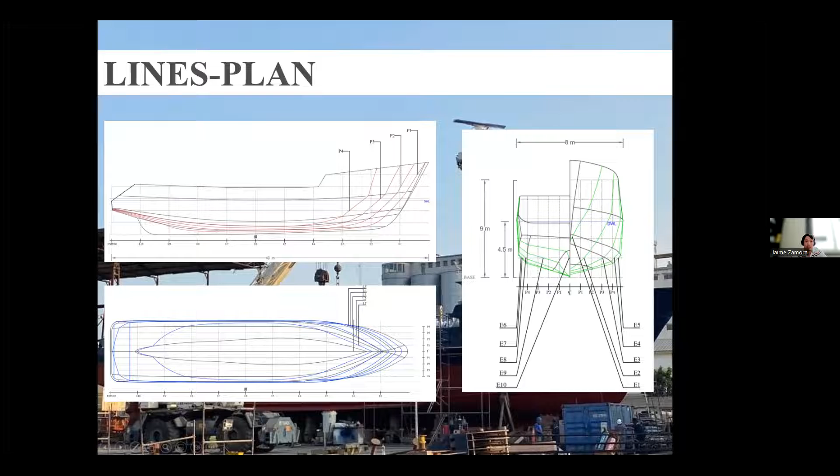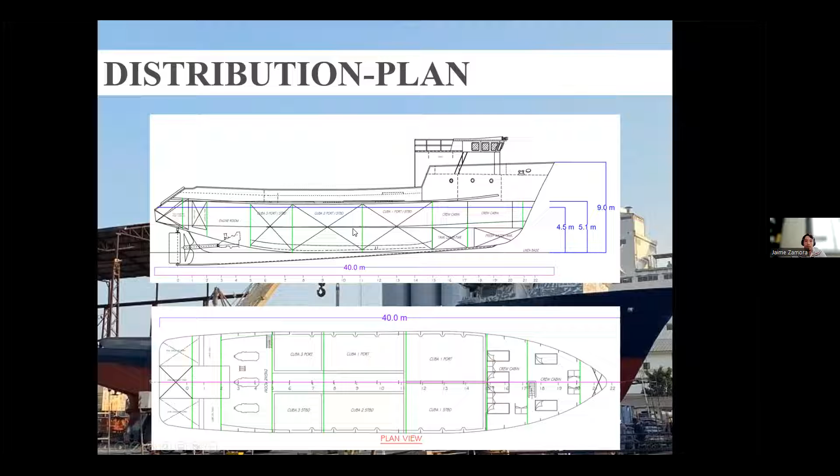The lines plan is shown in this part. We have the stations, but we are thinking of getting more stations to develop better results and a better 3D model. In the distribution plan, we can see the tanks, the compartments, and the ship holds, and all of them will define the loading conditions shown now.

In this project, we'll analyze 4 loading conditions. The first is the departure from port, with the tanks at 100% and the fishing holds at 0%. The second is the arrival at the fishing point, when the tanks are at 50% and the fishing holds 0%. The third is the departure from the fishing point with the tanks at 50% and the fishing holds 100%. And finally, the arrival at port with the tanks at 0% and the fishing holds at 100%.

One thing, when you present the loading conditions, try to mention the expected total weight, because in this case I cannot see which one has the largest weight. Usually, if a ship moves a lot, the first recommendation is to make it larger, because when you increase the size, you increase the mass and the inertia, and the acceleration is reduced. So that information is good. That's what I was expecting from you.

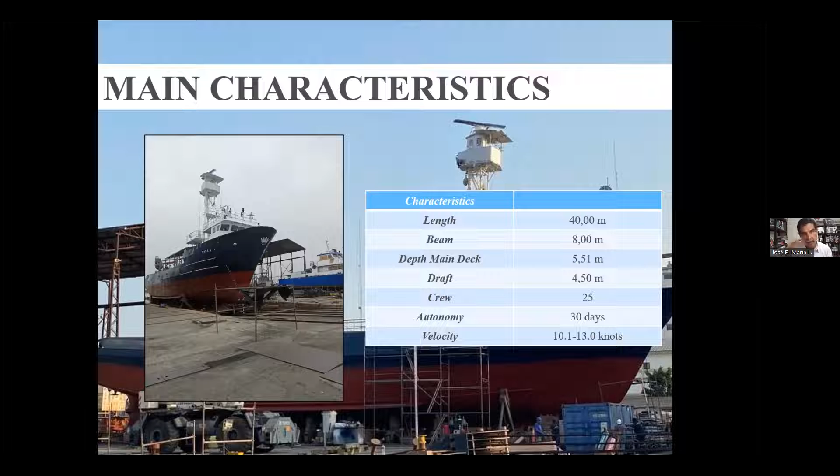Maybe you remember this from ship resistance and propulsion, but with full load, we are probably not going to reach 13 knots. So it would be very interesting if for a full loading condition you accept that you're not reaching 13 knots and do the analysis with only 11 knots. The others you can do with lower displacement but higher velocity. In that case, we can convert these four loading conditions. And very importantly, you have to start thinking about which parameters you are going to evaluate.

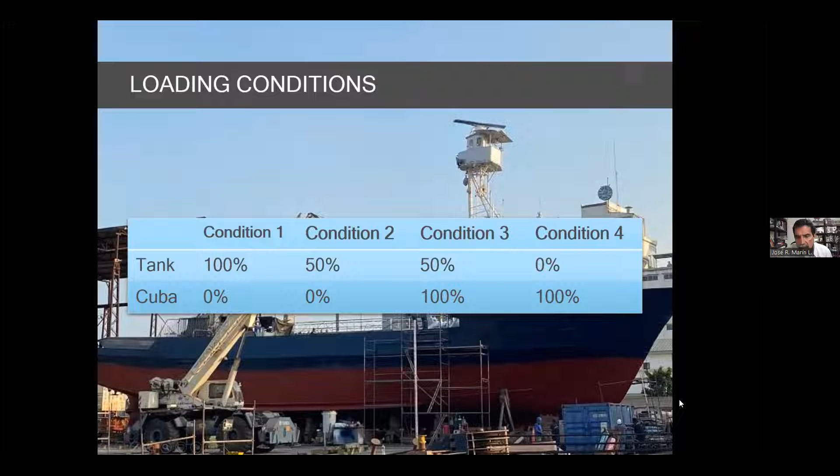Okay, good. Let's go on to the next one, group 6. Thank you. You can stop sharing. Go on, Lopez and Galarza. All right, my partner is going to share the screen.

Okay, so we are group number 6, and we are going to analyze the preliminary design of a 1,630 cubic meter hold capacity fishing vessel. This is our project in ship design, so we are going to analyze that for this subject. So the next slide, please.

So we're going to do a little introduction, talk about the owner and the requirements of the ship and the main dimensions. So the ship owner is the engineer Douglas Wingler. He works for Astinave, and the requirements are that we have to have a hold capacity of 1,630 cubic meters. The speed is 15 knots, and autonomy of 45 days.

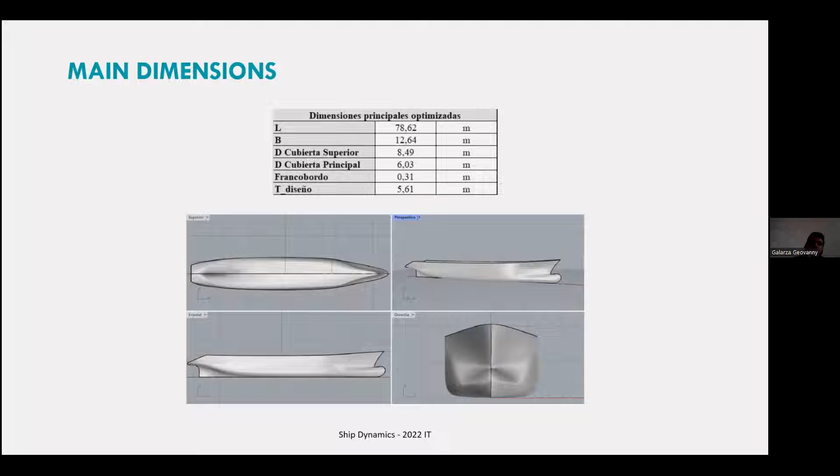The next one. We have already done the linear regressions and optimization, and we have obtained these main characteristics. And we have already done the 3D model in Rhinoceros. That's what we have until now. In the next slide, let me see. Yeah, we already put it. Okay.

The hydrostatic calculations: the GM is 0.22 and the block coefficient is 0.62. And the loading conditions calculations: departure at 100%, the second fishing ground at 50%, and return at 10%. Thank you.

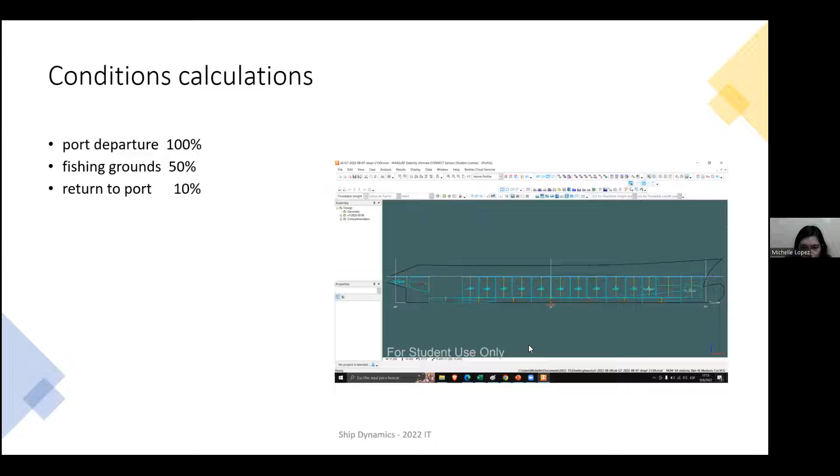It's going to be interesting. If you have two fishing vessels, it's going to be very interesting if what we can do is this: people from these two groups can talk to each other, and when you present the results, you can try to present somehow similar parameters. So at the end, we are going to be able to see what's the difference between these two, because there is a large difference in size, right? So it's going to be very interesting to learn from these differences, okay?

Doctor, and what parameter could be a good idea? I was thinking on that. In the case of a fishing vessel, one nice parameter could be, but I don't know if we are able to calculate that using MaxSurf, the reduction in velocity or increment in resistance because of the waves. It will be very interesting.

Okay. All right. Another thing that could be very interesting is that, for example, when you oscillate like that, when the aft end comes up, the propeller could be a little bit outside the water, right? When the propeller rotates, the water resists the rotation. But when it is suddenly outside, the air offers a much lower resistance. So you will have a sudden increment in acceleration. And then when it goes inside the water again, the resistance increases. So probably there could be some torsional problems in the propulsion systems. So it could be very interesting if we could get into that, okay?

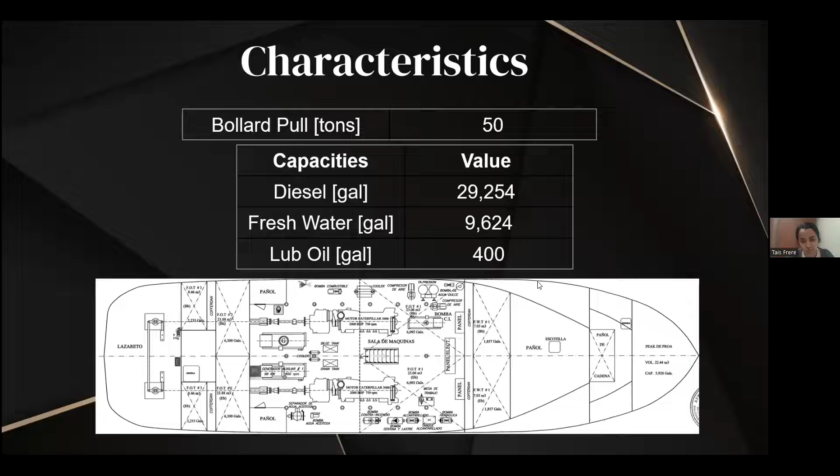Okay, hello everyone. For the last part, we share the propulsion system of the ship. We have 715 RPM. For the main engines, we have two Caterpillar 3606 diesel engines with V cylinders.

We are interested in choosing the main environment to operate in, with the highest significant wave height. We are interested in studying the response in this zone for the performance of the ship, especially in Manta. We have 1 meter significant height, and the minimum value is 0.57 meters.

These values for significant height, where did you get them? Because that changes with the sea state; are those the maximum values that you can expect in those areas, I'm asking? I searched in the chart. Yeah, but you have to be a little bit more careful with that, okay? Please, you have to include that information in here. Okay, so the source, it's very important.

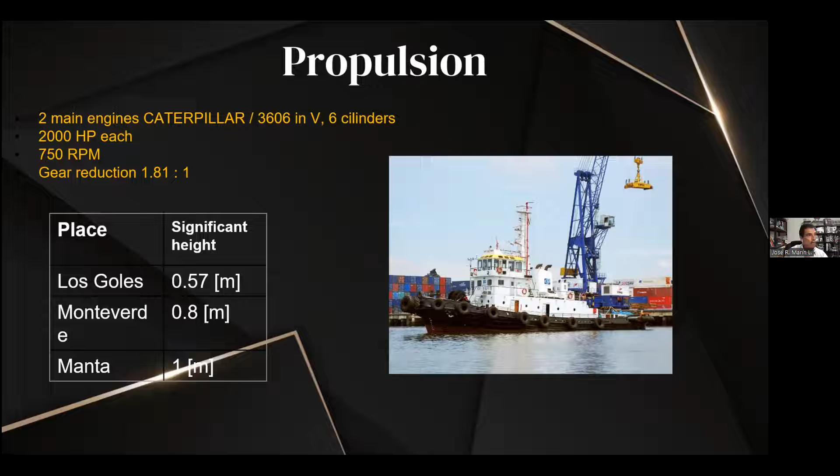Okay, the reduction here is correct, or... because you say that this is a real ship, or are you designing it? No, it's the real one. And according to the... I'm sorry, I didn't get it. Yeah, it's the real one. And according to the technical memory, I don't know if that's correct.

That's the gear reduction. Okay, it could be correct, but it just calls my attention because usually, well, it could be, but check that number, because if you have 750 divided by 1.8, that gives you around 400 RPM. Yeah, could be possible, but it's a little bit high to me. Okay. Let's just check that. Good.

Now, again, for this type of vessels, you have to look in the literature to see what parameters you need to calculate in order to judge the response of ships in waves, right? Because usually these tugs do not work far away from the coast, right? So it's a good idea if we could see in the literature what type of parameters we should calculate in order to evaluate this. Okay, and this is something for everybody. Okay, it's a good point.

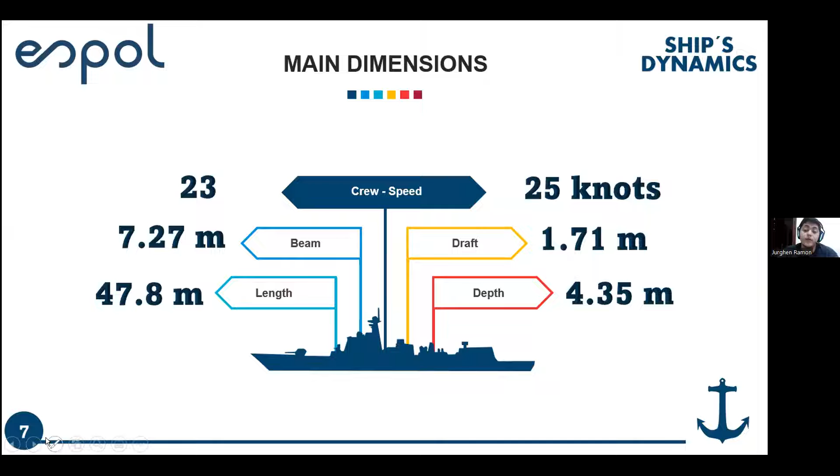Other characteristics of our ship are autonomy for 3,000 nautical miles, the propulsion system is a water jet, the minimum speed required by the sponsor is 20 knots, and the construction material is aluminum. For the analysis, we use the prototype of Cotecmar, the CPV 46, and our model is the other side, and the load conditions analyzed are 100%, 50%, and 10%. The route of our ship is Guayaquil, the Ecuadorian coast, to Galapagos and return.

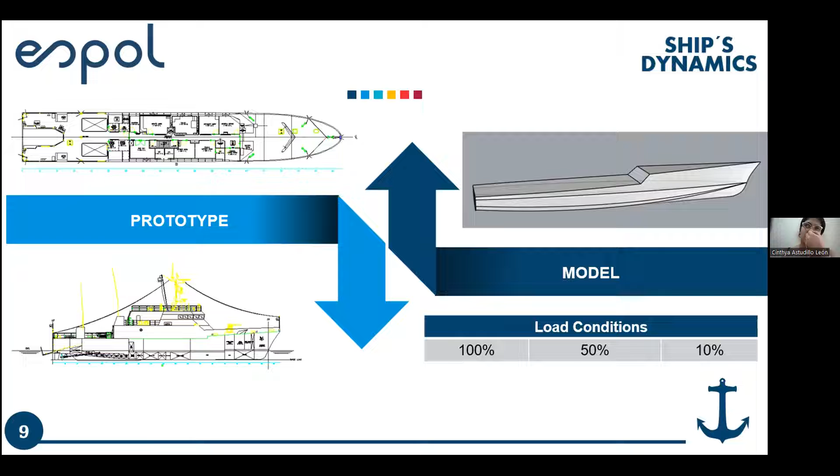Thank you. Again, when you mention the loading conditions, this is a recommendation for everybody. When you present loading conditions, it's a good idea that you say, okay, 100% of consumables or whatever, but you have to include the total weight of the vessel so we can compare the loading conditions. If the loading conditions are too close, we cannot expect much of a difference, right? But if the loading conditions are very different, we could expect some interesting results, okay?

Since this is a military vessel, probably there will be much information about standards and things like that. So it's going to be interesting to see what you will obtain. You mentioned that it's similar to the one designed by the Colombian Navy. Yes, doctor, because for our design we have to take a prototype for a parametric new vessel, and we saw the information of the Cotecmar vessel CPV 46. This is our prototype. Okay, that's fine. What I'm asking is, do you have any information from them? Because we can compare the results with theirs. For dynamic information, I don't have any, only for the construction and distributions.

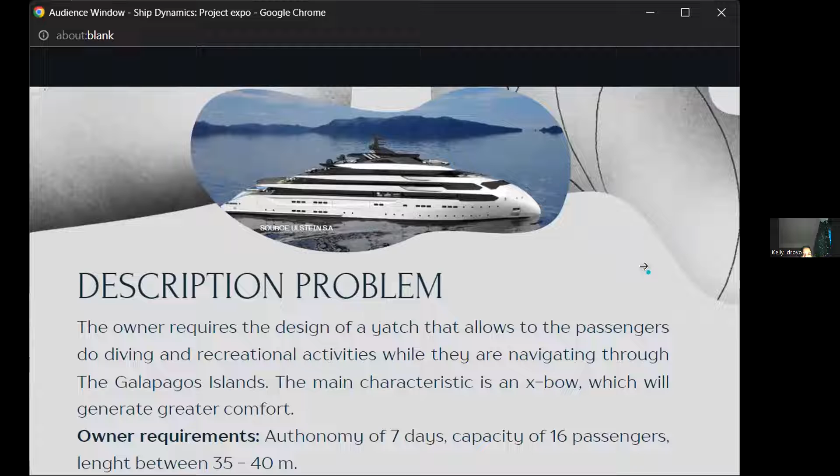Okay, according to the owner requirements, this is the description of the problem. The owner requires the design of a yacht that allows the passengers to do diving and recreational activities while they are navigating through the Galapagos Islands. The main characteristic is an X-bow. This is the main difference from the projects done in the past, which will generate greater comfort. And in a specific way, the owner's requirements: the ship has to have an autonomy of 7 days, the capacity has to be 16 to 20 passengers, and the length has to be between 35 and 40 meters.

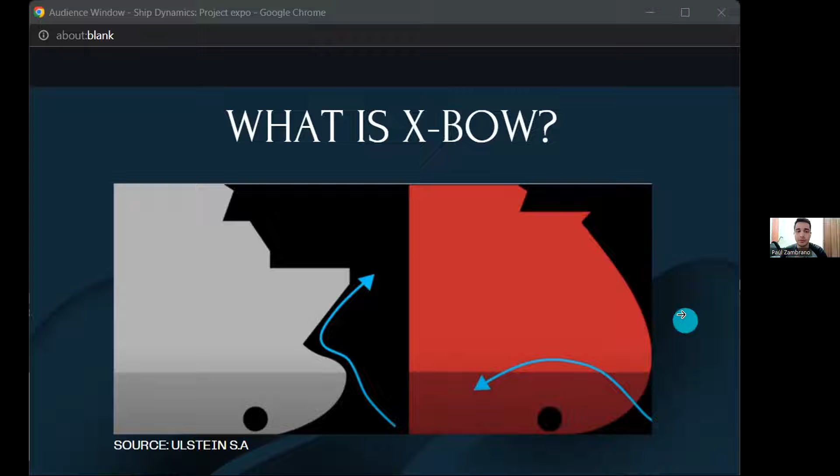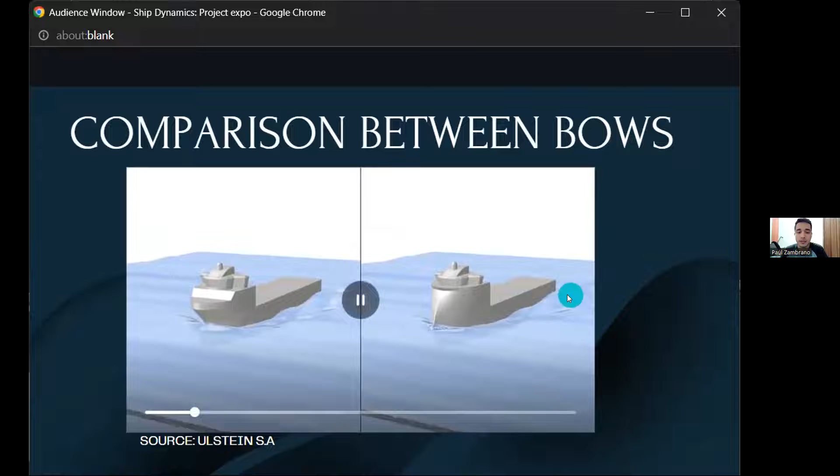The X-bow has a tapered shape with different volume distribution, as well as the section angles, resulting in a piercing effect in the waves. Also, this reduces the impact and pitching loads. Comparing the volume with the conventional bulbous shapes of other ships, the X-bow has more displacement and volume, which means that space can be used for more area for the rooms of the passengers. The shape of the X-bow distributes the force of the waves more uniformly along the surface of the bow. This allows the ship to remain more stable in climatic conditions. Also, this improves the comfort of the passengers and the crew.

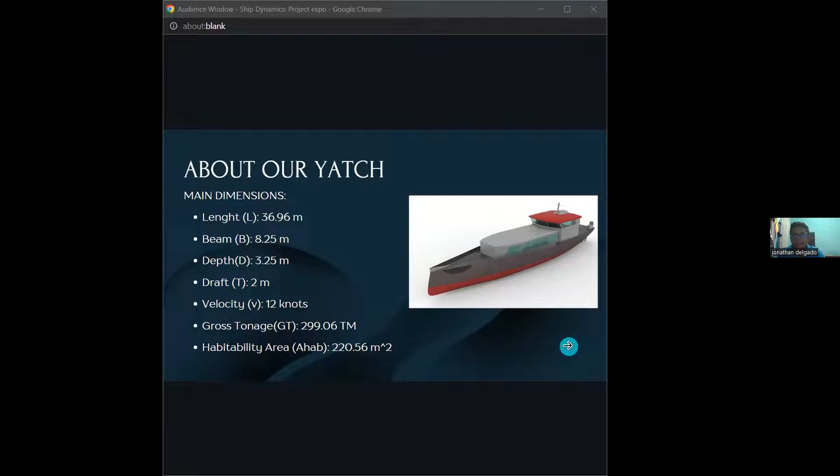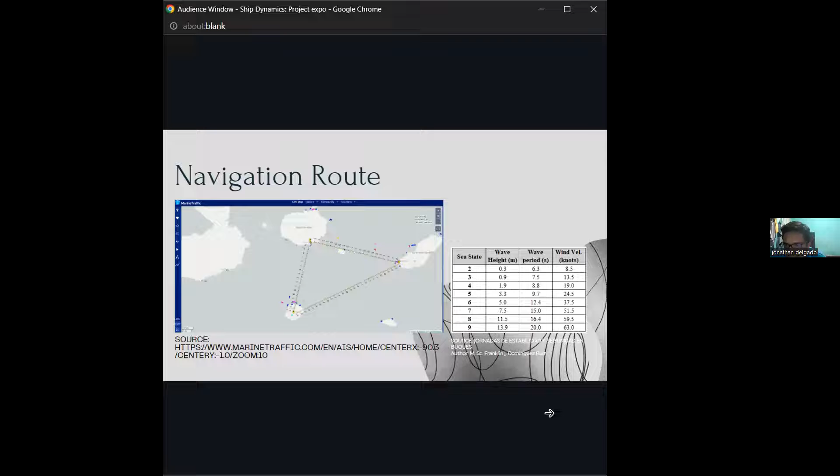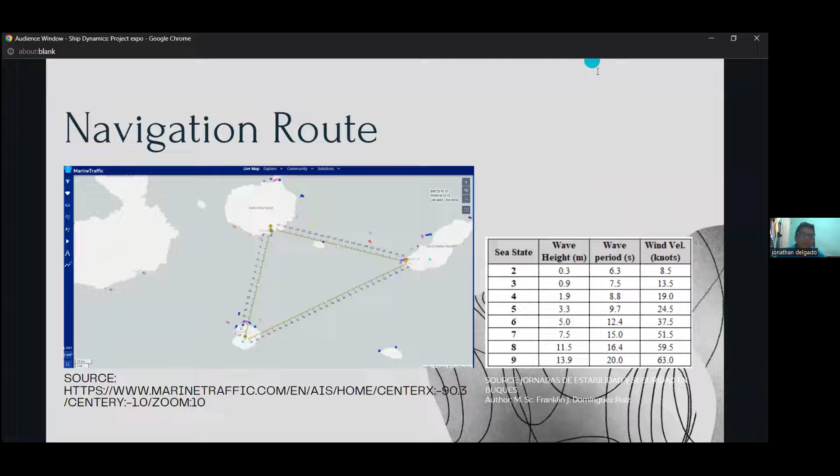Okay, about our yacht. The main dimensions are length 36.96 meters, beam 8.25 meters, depth 3.25 meters, draft 2 meters, velocity 12 knots, and the habitability area 220.56 square meters. Okay, the navigation route according to the owner's requirements is in the Galapagos Islands, where the sea state is 4, where the wave height is 1.9 meters and the wave period 8.8 seconds. Wind velocity is 19 knots. Okay, with this information, we intend to estimate the vertical acceleration in order to improve the comfort of this ship.

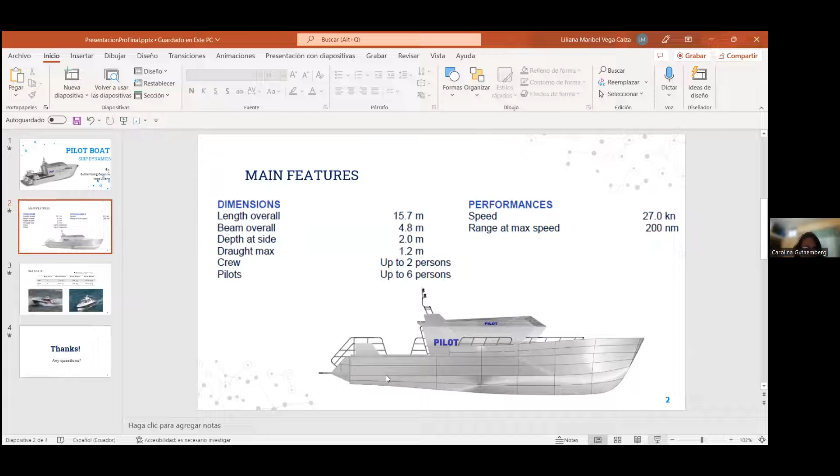The project we developed in ship dynamics is the pilot boat. A marine pilot boat is a vessel that is specifically used to carry helmsmen or marine pilots from harbors to ships that need piloting or vice versa. The type of boat that we will work on in the final project has the following main characteristics. The length is 15.7 meters. The crew is 2 persons and the passengers a maximum of 6 persons. The velocity is 27 knots. Next, please.

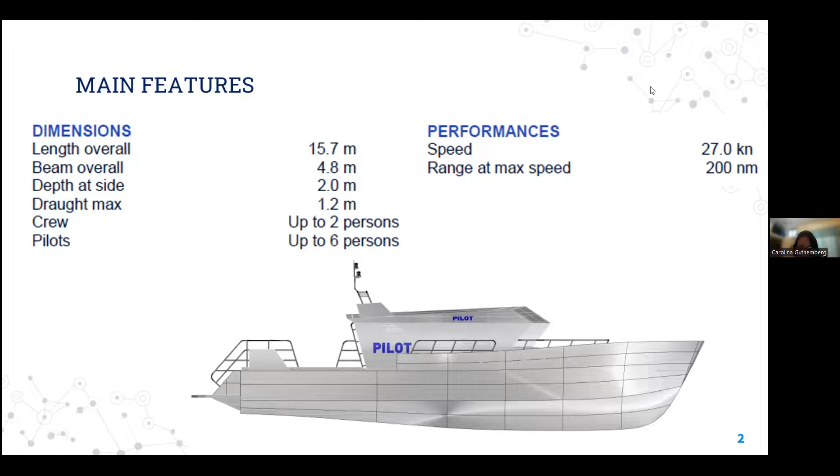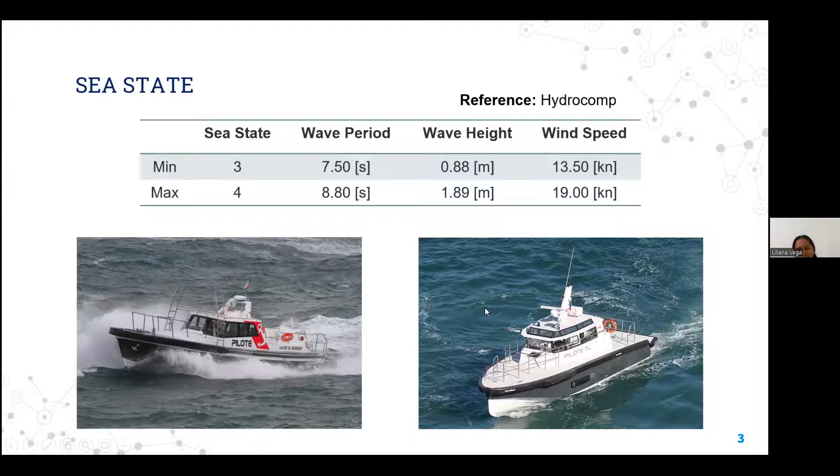And then finally, this boat is intended for the coast of the continent and the Galapagos Islands, and therefore the analysis of the sea state is 3 to 4, and wave period is 7.50 and 8.80, and wave height is 0.88 meters and 1.89 meters, and wind speed is 13.50 and 19 knots. Thank you. Yeah. How many loading conditions are we going to consider?

In this moment, I don't analyze this condition. Yes, the people is the many conditions. The minimum people is 2 people, and the maximum is 6. And we vary the velocity. You vary the number of persons. Yeah, there's not much of a difference in weight. Yeah, probably the best is to change the velocity.

But the thing is this, okay? In Maxsurf, see, the problem with this ship is that it's very, very fast, 27 knots. That means that it's going to plane. The problem with that is that it's going to be above the surface. Or not above, but just very close to being above the surface. What's the problem with that?

The problem of using Maxsurf to analyze that is that the first intention of Maxsurf is to apply it to displacement ships. You try to apply it to planing boats, the results, I don't expect them to be very good. So I have a problem with that. It is possible that the results from Maxsurf are not useful to you.

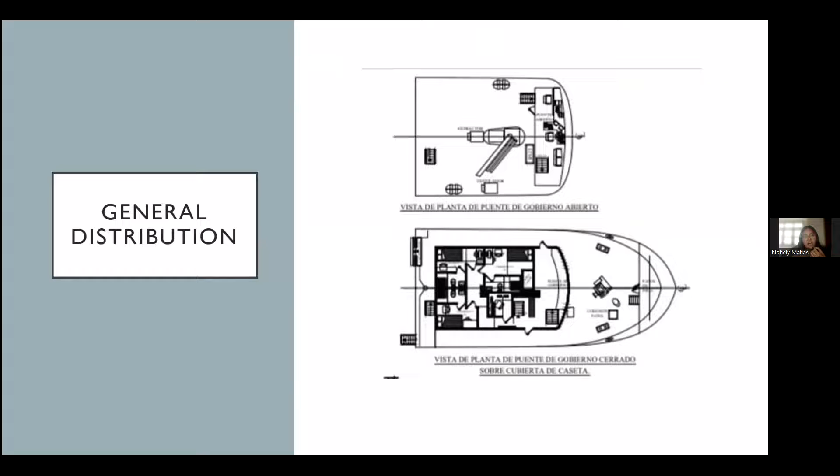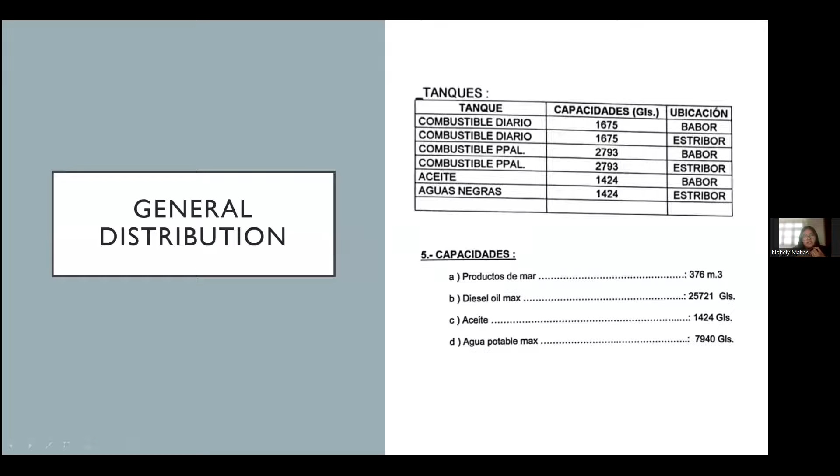Next, we have the distribution plan of the ship. The ship has 6 holds, 3 holds to port and 3 holds to starboard. Hold 1 for port and starboard has 72 cubic meters, hold 2 has 48 cubic meters, and hold 3 has 68 cubic meters. Next slide. This ship is composed of two fuel tanks, 1 oil tank, and 1 waste tank. This is the description of my ship.

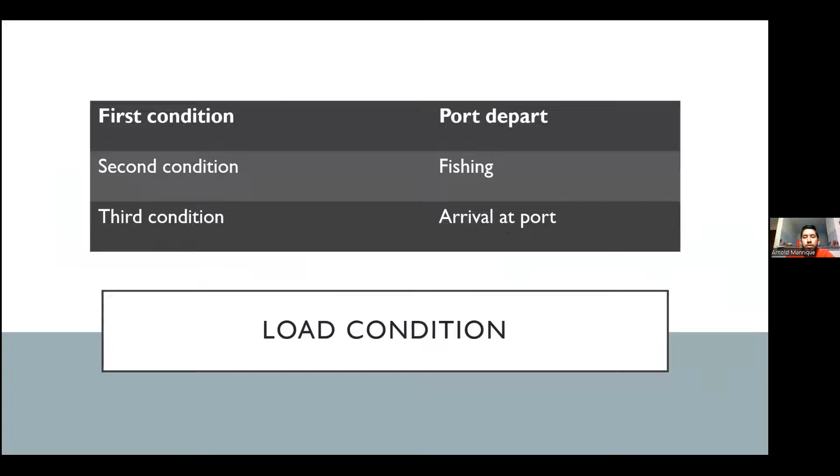Well, this is the condition we are to analyze. The first condition when departing the port, the second condition to analyze is when the ship is fishing, and the third condition is the arrival at the port. Thanks.

Okay, and do you have, for example, the displacement at each of these loading conditions? Not yet, doctor. Okay, but do you have the lines of the ship? Yes, the lines. Well, from the lines of the ship, you can estimate the displacement, assuming a certain loading condition, a certain draft. GMT? Yes. How come you have the GMT and you don't have the displacement? Okay, right now we don't have the information.

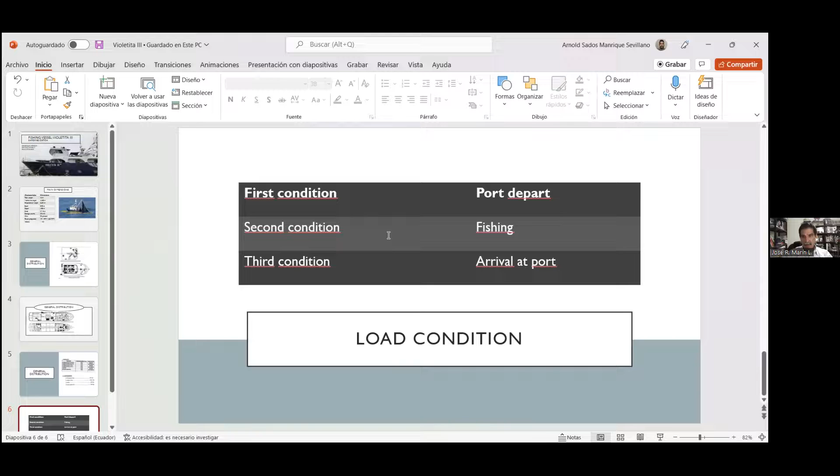All I need you to know is that you have to be careful, because if you get behind, you get behind, and we have a very strict itinerary to follow. Okay. Let's go to the last group, number 7.

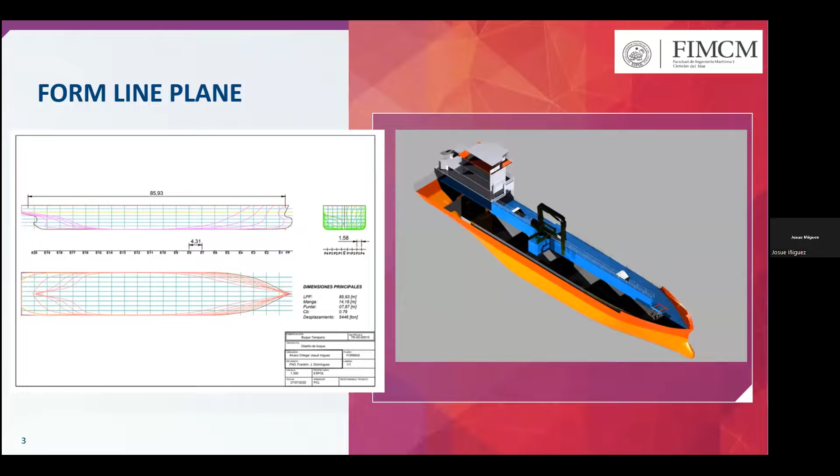We are going to apply for the moment 3 conditions with respect to the fuel tank and the cargo tank. We transport petroleum. Therefore, we believe they are ideal for the wave response project. The first condition is loading for departure. The second condition is unloading of a load at one point of the trip. The third condition is the return to the port. In these 3 conditions, fuel and cargo tanks have more influence in this type of ship.